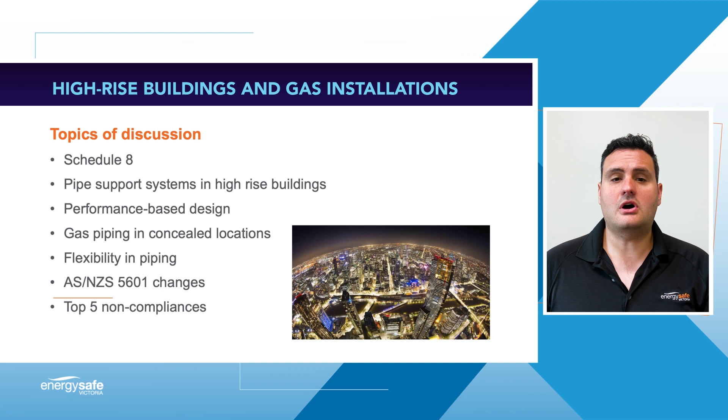Gas piping in concealed locations will highlight what is considered a concealed location and what are the requirements in order to comply. Consideration of various methods to provide flexibility for copper piping systems in high-rise installations. Proposed changes to AS/NZS 5601 Part 1 and top 5 high-rise non-compliances identified by ESV.

My name is Doug Rennie. I'm a gas inspector with Energy Safe Victoria and I'll be discussing Schedule 8 gas application document requirements. To begin, we need to understand why Schedule 8 documentation is required.

The Gas Safety Act 1997 has been gazetted by the Victorian Government. The Act calls up the Gas Safety (Gas Installation) Regulations 2018, which contains the Schedule 8, listing requirements for additional information that is required in certain circumstances. These circumstances include installations that exceed 3,800 megajoules per hour, exceed 200 kPa, or exceed 10 stories above the ground.

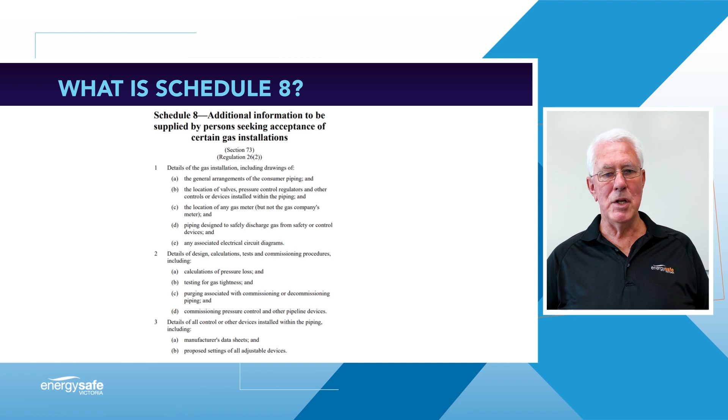At times a response will be not applicable, which is perfectly fine, but an explanation will be required to support your response. Some Schedule 8 applications clearly don't meet our expectations. It is in your best interest to provide ESV with all the relevant information required for the Schedule 8 application. This information needs to be relevant, detailed and comprehensive, responding to each listed item.

If the information is adequate for ESV to process the application without requiring further information, this will prevent subsequent delays in the processing of your application. Details of the gas installation, including drawings of the general arrangement of the consumer piping, should be in the form of a legible schematic.

The drawings should include a title block with the installation address, the location of any valves, regulators or other control devices, the method used for pipe support, both vertical and horizontal runs, including provision for flexibility where required. For example, anchors, slide guides, flexible hoses and the like. Gas riser shafts or service cupboard details, including location of any offsets.

Ventilation details relating to the gas riser shaft or service cupboard. The piping materials, operating pressure, location of submeters, vent line design and its termination point. Any associated electrical circuit diagrams for devices or interlocks that may be installed, such as gas solenoid valves, pressure proving systems, or air pressure switches used to monitor mechanical ventilation.

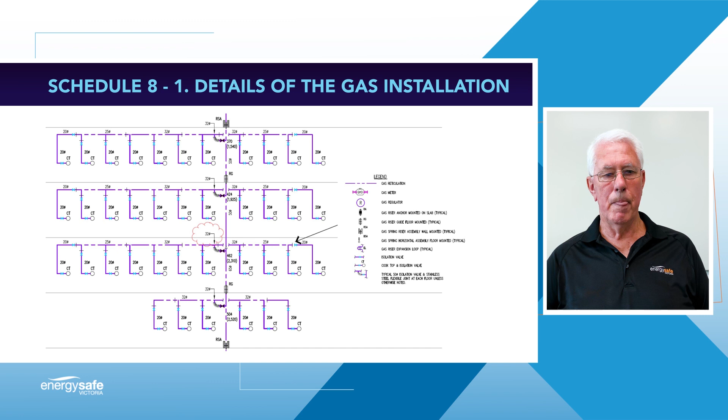The design pressure drop must be nominated in your application. This requirement relates to the pipe size and not to the gas tightness testing. Allowable pressure drop is usually calculated considering the supply or metering pressure and the minimum pressure required for an appliance or regulator. 5601.1 Appendix F provides guidance for the pipe sizing and allowable pressure drop.

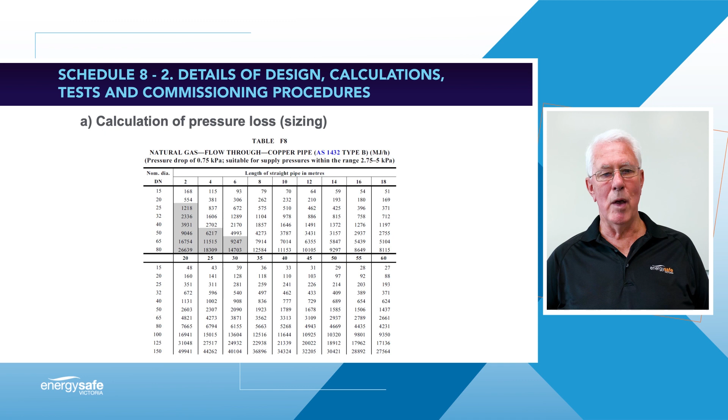Where 5601 is used for pipe sizing and allowable pressure drop, please nominate the sizing table used. Pipe manufacturers may provide appropriate pipe sizing tables for pipe materials not listed in 5601.1 Appendix F, for example, cross-linked polyethylene PEX pipe. If determined by calculations other than from 5601.1, you should nominate who has completed the calculations and their experience.

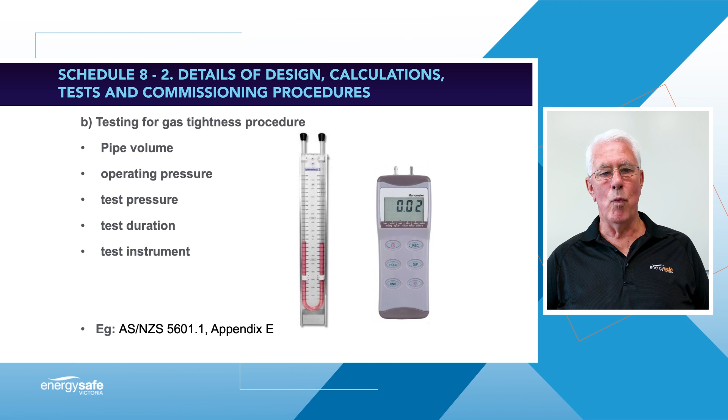Stating in the application that 5601.1 Appendix E is being used as the gas tightness testing procedure satisfies this section of the Schedule 8, but you must also include the pipe volume, operating pressure, test duration, and the test instrument used, which must be suitable for the pressure and the volume being tested. For example, a dial gauge with a range of 1 to 1000 kPa is not suitable for a 7 kPa test.

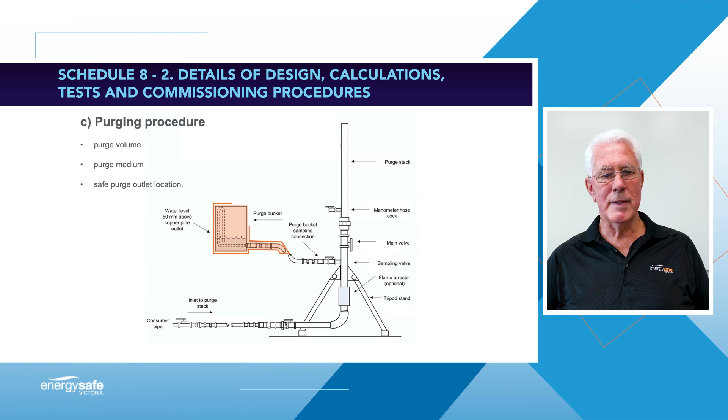For large volume installations above 30 litres, as is commonly found in high-rise buildings, you may reference ESV Gas Information Sheet 14 in the development of your purge procedure. For branch lines under 30 litres, you may reference 5601.1 Appendix D. A comprehensive purge procedure must be submitted with the application and must also include the purge volume, the purge medium to be used, such as an inert gas for larger installations, the safe purge outlet location, and purge equipment that will be used, such as a purge stack, purge buckets, or a suitable gas detector.

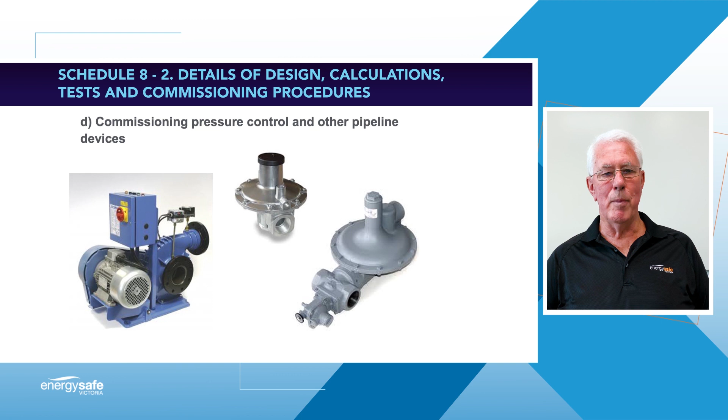Provide details about the commissioning procedure for pressure control devices such as regulators, including overpressure shutoff (OPSO) regulators, pressure proving solenoid valves and gas boosters. In most instances, a copy of the manufacturer's commissioning instructions will satisfy this requirement. This is also important information that will be required for the project manager and commissioning staff on site.

Manufacturers' data sheets are required to be submitted with your Schedule 8 documentation for all control devices and appliances that will be installed. Data sheets should include information such as installation instructions, product specifications, and certification details as applicable. Where gas cookers are installed, the installation instructions should include both the cooker and the range hood to ensure appropriate clearances are provided.

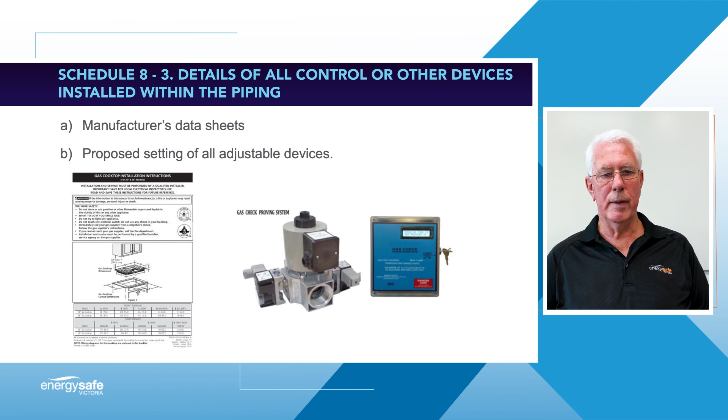Provide the proposed settings of all adjustable devices. This will include settings for devices such as regulators, overpressure shutoff, pressure switches, and the like. ESV has developed Information Sheet 60 to assist you with your Schedule 8 application. This can be found on the ESV website under Gas Technical Information Sheets.

My name is Kevin Dwyer and I'm a gas inspector with Energy Safe Victoria. I will be discussing pipe support systems and performance-based designs. This presentation will be in two parts, with Part A discussing the means of compliance requirements in AS/NZS 5601 Section 5 for the support of consumer piping, and Part B will outline the option for submitting a Section 2 performance-based design for a piping support system where the support method will not comply with Section 5, and discuss the minimum requirements that Energy Safe Victoria expect for a performance-based design application.

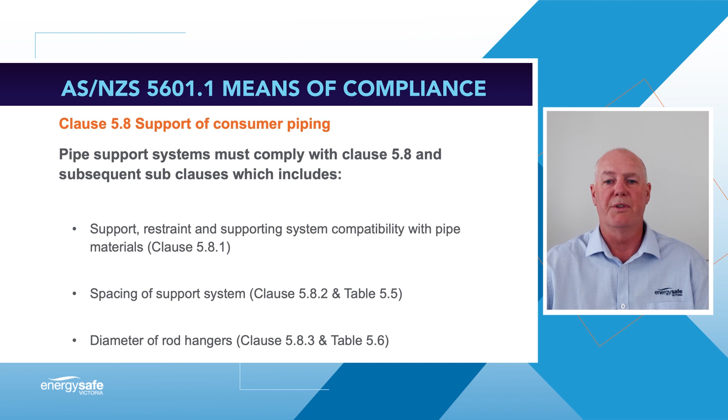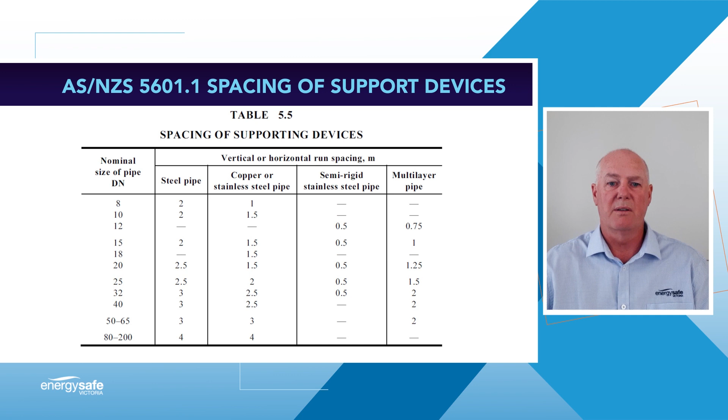Clause 5.8.2 and Table 5.5 detail the means of compliance requirements for the spacing of support devices in the piping support system. And Clause 5.8.3 and Table 5.6 detail the means of compliance requirements for rod hangers used as part of the piping support system. We will now explore these clauses in further detail. Table 5.5 details the spacing requirements for support devices within a piping support system. You will note that support spacings vary based on the pipe material and diameter. Spacings apply to vertical and horizontal runs.

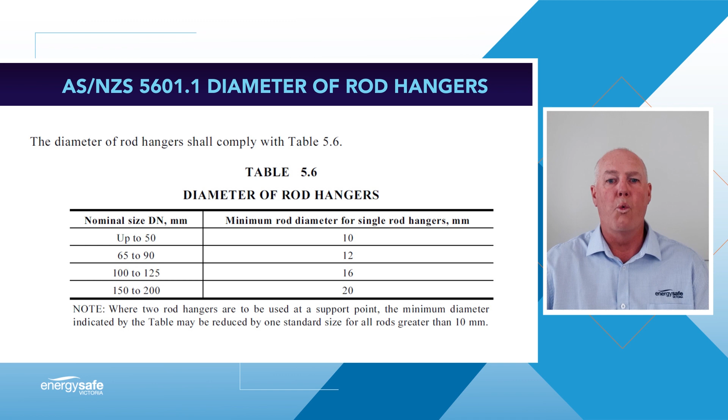Table 5.6 details the minimum rod hanger diameter for a given pipe size. The practice of installing undersized rod hangers at spacings less than those required by Table 5.5 is not a means of compliance with Clause 5.8. For example, 100mm copper pipe requires a 16mm rod diameter at a maximum 4m spacing. Installing a 12mm rod hanger at 2m spacings for 100mm copper pipe is not a means to comply.

The normative note under Table 5.6 permits rod hangers with diameters greater than 10mm to be reduced by one size if two reduced size rods are used at the one support point. This concession only applies for the support of one pipe and does not apply where multiple pipes are installed alongside each other, for example on a trapeze at the one support point. The practice of reducing the diameter of rod hangers greater than 10 millimeters and then increasing the amount of rod hangers, thus reducing the spacing of support devices, is not a means of compliance with Clause 5.8.

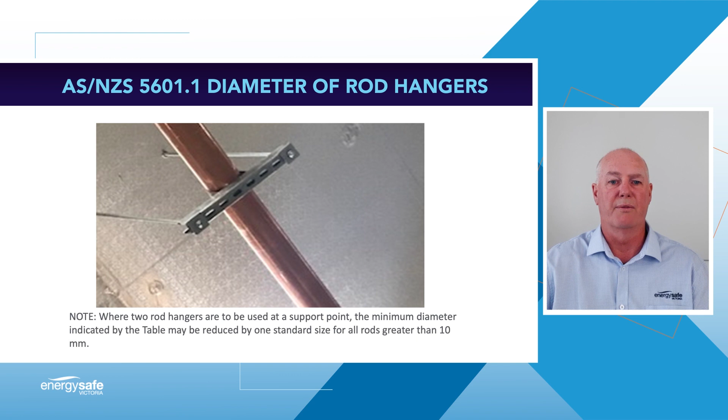In Part B of this presentation, we will outline the option for submitting a Section 2 performance-based design for a piping support system where the support method will not comply with Section 5, and discuss the minimum requirements that Energy Safe Victoria expect for a performance-based design application.

The current gas installation standard includes Section 2, performance-based design and other essential requirements. This section was not previously part of the 2004 AS5601 gas installation standard. Section 2 was introduced to allow industry to design a gas installation as an alternative to the means of compliance sections 3 to 6.

Performance requirements are listed for the following areas: general work and safety requirements, materials, fittings and components, consumer piping, flues, and installing gas appliances. Requirements for each area are detailed in clauses just like in sections 3 to 6.

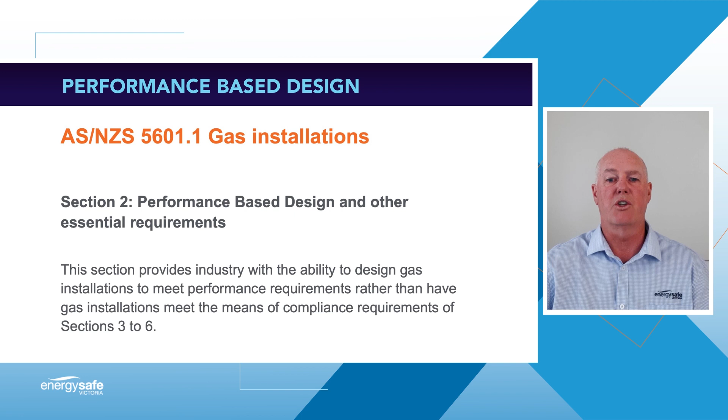Section 2, Clause 2.1 General lists specific requirements when designing a gas installation to a performance-based design. Designs are required to provide an equivalent level of safety, convenience, and efficiency of operation as those installations carried out to comply with sections 3 to 6. A performance-based design shall be documented and kept for 7 years.

Practitioners are advised to consult with their insurance provider and the relevant building surveyor prior to undertaking a performance-based design to ensure they are permitted to carry out an installation to a performance-based design. Energy Safe Victoria also has minimum requirements for submitting a performance-based design, including a clear statement that there is a performance-based design as part of the gas application.

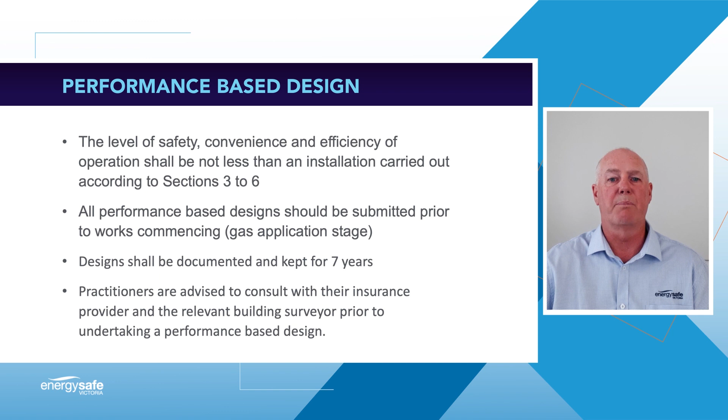You will need to attach a separate document that outlines the design proposal. This should be done for each individual gas application where the performance-based design applies. The performance-based design should be submitted with the gas track application. This will prevent unnecessary delay with the final acceptance of your gas application.

The performance-based design should clearly state the Section 2 clauses it is intended to satisfy and identify the related clause or clauses in the means of compliance sections 3 to 6. Design applications will be reviewed on a case-by-case basis, and no guarantee is given that a performance-based approach will be accepted by ESV.

Information Sheet 63 has been created to provide guidance to those planning to submit a performance-based design for consumer piping support. I strongly encourage everyone that is considering developing a performance-based design to familiarise themselves with the information within this sheet. Information Sheet 63 outlines ESV's expectations for this type of application.

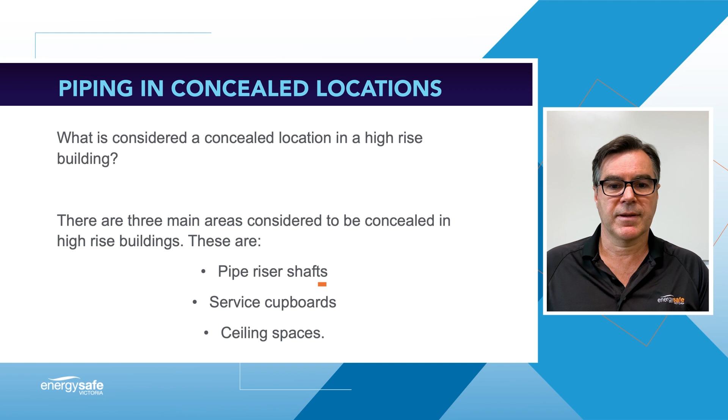ESV has developed Information Sheet 10 to assist industry in understanding how to meet the requirements of the gas standard as it applies to high-rise buildings. In order to determine what is required when installing pipework in high-rise buildings, we first need to understand what is considered a concealed location. There are three main areas considered to be concealed in high-rise buildings. These are pipe riser shafts, service cupboards and ceiling spaces.

Table 5.2 of AS/NZS 5601 describes the requirements for piping in concealed locations. This table gives guidance to the accessibility and ventilation requirements based on the operating pressure and the type of jointing method used as listed in Table 4.1.

For example, a fully welded pipe with permanent joints up to and including 7 kPa is not required to be accessible or ventilated. However, if non-permanent joints are installed in the same scenario, then ventilation must be provided. Access must also be provided to components such as valves, hoses and spring clips.

You will note from the table that pipework exceeding 7 kPa must be accessible, located in a ventilated area and have permanent joints. In order to determine what a non-permanent joint is, first we need to consider the definition of a permanent joint. This is a joint that is not intended to and cannot readily be disassembled. Examples of this are brazed, welded, crimped and hydraulically or mechanically compressed joints. Therefore, any male or female thread, compression fitting or flange is considered a non-permanent joint.

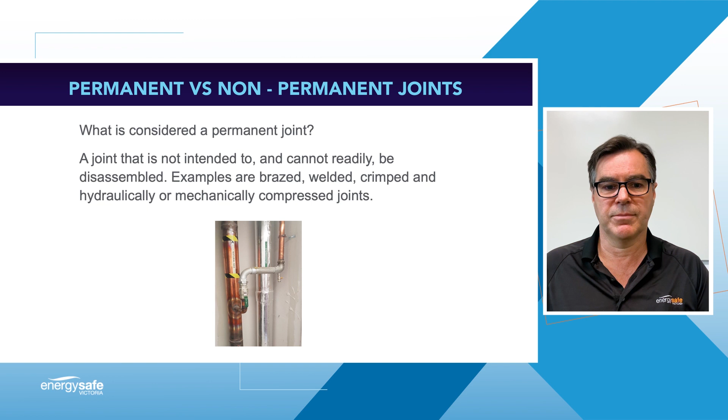We can see in the photo an example of non-permanent joints including the valve, test point and hose assembly. The use of a quick setting thread compound such as Loctite is not considered to be a permanent joint.

A pipe riser shaft is considered a shaft that is vented at the top and bottom and open from floor to floor in a high-rise building. It is sealed from adjacent areas and normally fire rated. Consumer piping and components installed in a pipe riser shaft are deemed to be concealed, even if accessible via an access panel or door.

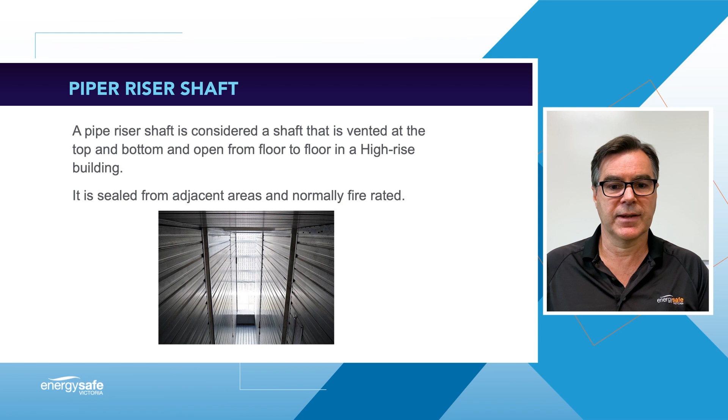When non-permanent joints are installed, pipe riser shafts require venting to a safe location. The riser shaft will need to be sealed from adjacent wall and ceiling cavities. This is to prevent the possibility of leaking gas migrating into the building structure, taking into consideration that the shaft itself should be ventilated to a safe location external to the building.

A service cupboard is considered a void that is accessed via a service door and sealed from level to level. Consumer piping and components installed in a service cupboard or void are deemed to be concealed, even if accessible via an access door. Where non-permanent joints are installed, service cupboards will require venting. The service cupboard or void will need to be sealed from adjacent wall and ceiling cavities to prevent the possibility of leaking gas migrating into the building structure.

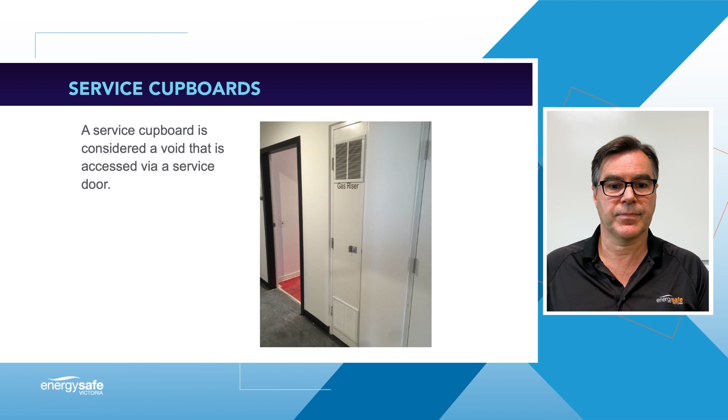Consumer piping and components installed in ceiling spaces are deemed to be concealed, even if accessible via an access hatch or panel. When non-permanent joints are installed, ceiling spaces will require venting. Ceiling spaces in high-rise buildings are difficult to ventilate due to the building construction, and therefore non-permanent joints should be avoided. This can be achieved by using permanent joints such as crimped or welded fittings.

Ceiling spaces containing non-permanent joints, for example occupancy isolation valves, are to be isolated from the ceiling to prevent the possibility of leaking gas migrating into the building structure. This may be achieved by installing a sealed box surrounding the non-permanent joint with an access hatch incorporating ventilation to the space below.

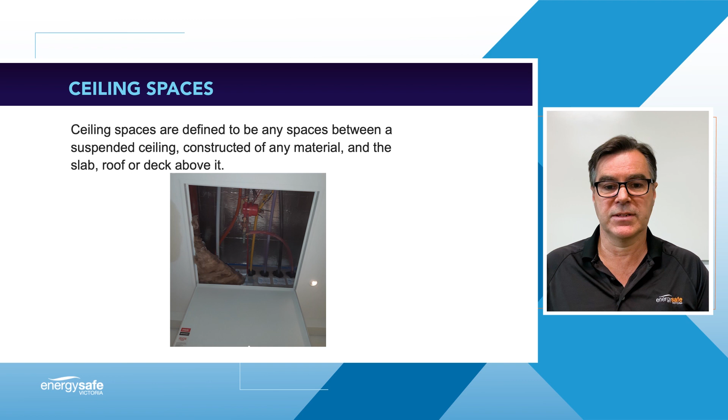Where you have established the need to provide ventilation for these concealed locations, you then need to calculate the minimum size for these ventilation openings. Ventilation openings shall be provided at each end of the area and must terminate in a safe location. Table 5.3 enables you to calculate the minimum required ventilation opening size based on the cross-sectional area of the void or duct. Most service cupboards or pipe riser shafts will have a cross-sectional area less than 7.5 square metres. Therefore, the minimum free ventilation area for each opening will be 0.05 square metres.

0.05 square metres is equivalent to 50,000 square millimetres. This equates to an area of free ventilation of at least 223 millimetres by 223 millimetres, or 9 inches square in the old scale. This is the minimum free ventilation area required for each vent. Please note that grills will restrict the free ventilation area, and the overall vent size may need to increase accordingly.

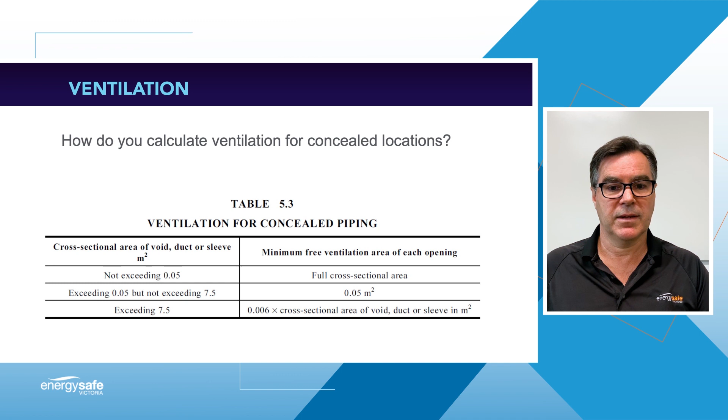Where service cupboards are to be vented, the vent locations should be within 5% of the top and bottom of the enclosure. This may require a false ceiling to be installed in order to achieve the 5% requirement.

Depicted is an example of how ventilation has been provided for the pipe riser shaft. The openings have been calculated to provide a minimum of 0.05 square metres. By coordinating with your builder, these penetrations could be provided by simply boxing out within the riser shaft at construction stage. This will prevent the need to drill adjacent core holes in order to comply.

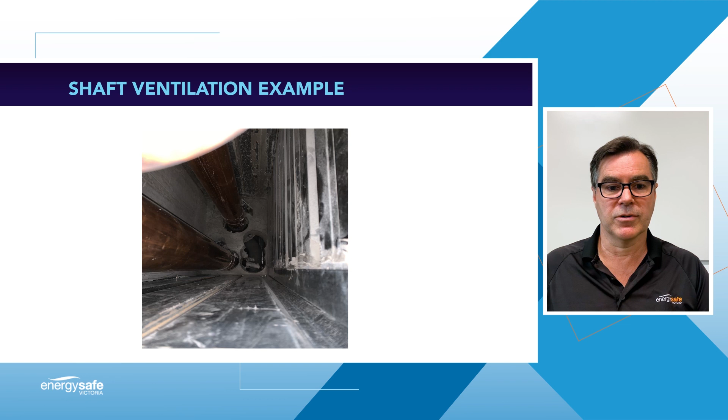Hi, my name is Paul Makarievsky. I am a gas inspector with Energy Safe Victoria, and I will be discussing flexibility in piping systems.

In many instances, flexibility of consumer piping is overlooked on horizontal sections. For example, pipework located in basement car parks and on rooftop plant decks. This presentation will help you understand where flexibility for consumer piping is required and how it can be provided.

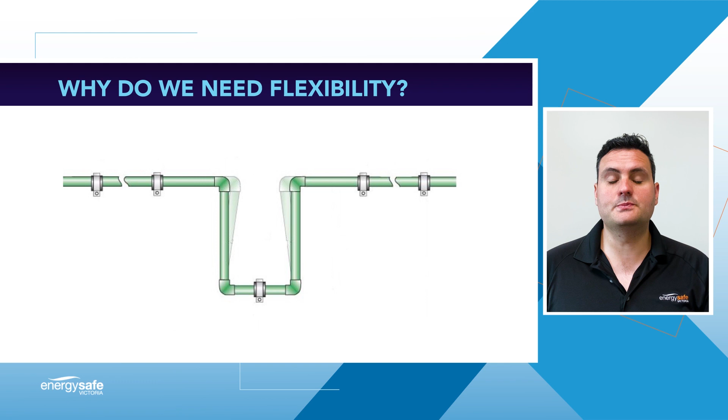Why do we need to provide flexibility? Copper piping expands and contracts with temperature changes. Therefore, in a copper piping system, the pipeline can buckle or bend when it expands unless compensation is built into the system. Harmful stresses, buckling and bending are prevented by providing expansion joints, loops or offsets, and pipe slide guides.

Consumer piping shall be designed to have sufficient flexibility to prevent excessive stress in the piping material and attached equipment caused by thermal expansion and contraction, excessive bending or loading at joints, and undesirable forces or movements at points of connection to equipment or at anchorage or guide points.

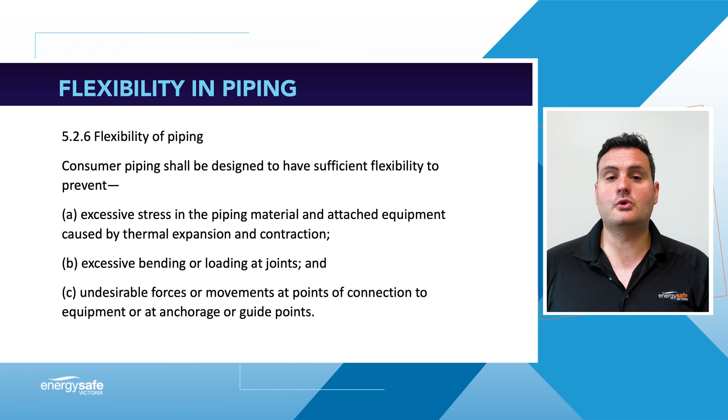What does this mean to you as a licensed gas fitter? It means that formal calculations may be required where reasonable doubt exists regarding adequate flexibility of the system. Based on these calculations, the requirements of this clause may be satisfied by use of one or more of the following: bends, loops or offsets formed in the piping, flexible joints or couplings of the type designed to absorb thermal expansion and contraction, or expansion joints.

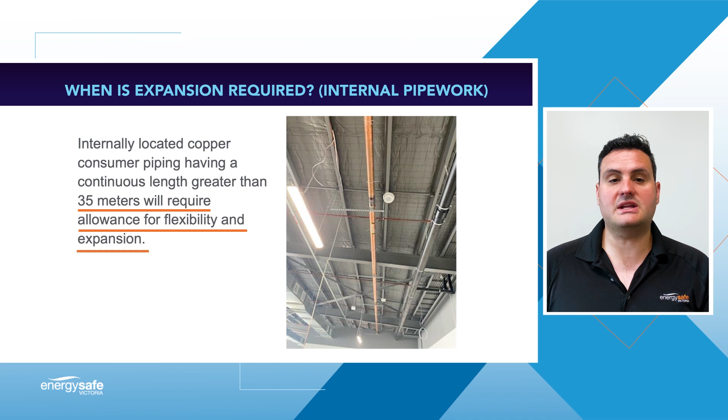So when is expansion required for piping systems? Based on calculations of the rate of linear expansion for copper when subjected to temperature change, we know that internally located consumer piping having a continuous length greater than 35 meters will require allowance for flexibility and expansion to be provided. Copper piping systems located externally are subjected to greater temperature changes, and therefore provision is required for expansion where a continuous length exceeds 17 meters.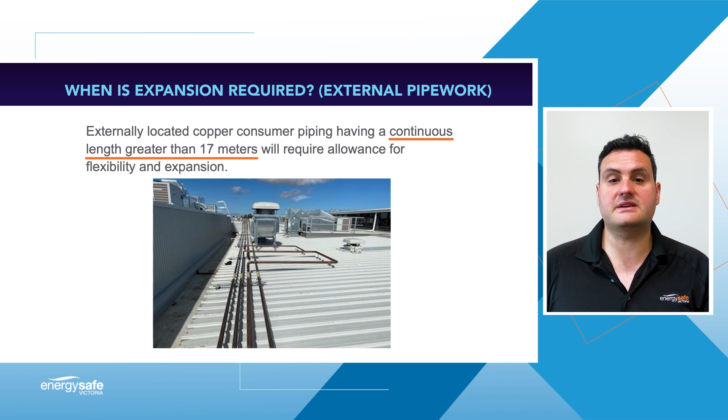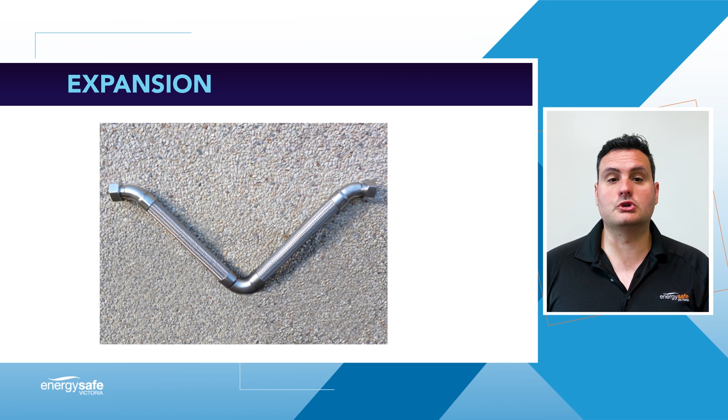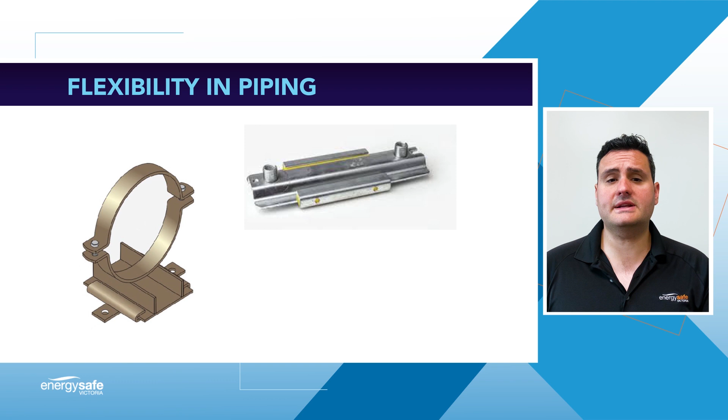There are various methods whereby expansion can be provided to a copper consumer piping system. Some common methods include flexible hose assemblies and expansion offsets or loops installed within the pipework. Where provision for expansion is installed, such as offsets and loops on copper piping systems, pipe slide guides may be required. An expansion loop on its own will not necessarily allow adequate pipe movement if every support point on the piping system is rigid. Pipe slide guides allow for the piping system to move with thermal expansion.

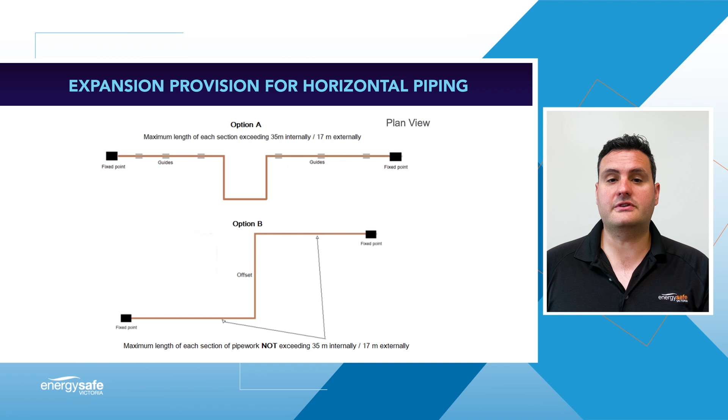Allowance for this expansion is to be provided between the fixed points using either a loop, as depicted, offsets, or other suitable means. The size of loops and offsets will need to be designed to allow for the calculated movement. In option B, the pipe layout is designed with an offset to allow for expansion, and runs are limited to less than 35 meters internally or 17 meters externally. In this instance, the main run can be clipped as normal with consideration to the location of clips on the offset, allowing for any expansion to take place.

Hi, my name is David Crew. I'm a gas inspector with Energy Safe Victoria, and I will be discussing proposed changes to AS/NZS 5601. By way of background, the Standards Australia AG6 Committee is comprised of 35 members representing various organisations within the gas industry. This includes the Gas Technical Regulators, Master Plumbers, Gas Appliance Manufacturers Association, and Gas Energy Australia.

The current AS/NZS 5601 project commenced back in July 2016, with a public comment draft expected to be released in early 2021. Everyone is given the opportunity to comment on the draft. Once the public comment draft closes, all comments will be reviewed by the Standards Committee, and a second public comment round may be required based on the extent of changes made. The final publication of the standard will be made once the final draft has been accepted by a committee ballot.

Some of the proposed changes to the standard include: Section 2 has been separated into essential safety requirements and performance-based requirements. Brazing to be prohibited within 1 metre of a joint with non-metallic components. New drawings including penetration details for consumer piping in cavities consistent with plumbing installation standard AS/NZS 3500 series. Prohibition of the installation of multi-layer pipe above ground and external to buildings. The provision of an emergency isolation for multi-layer pipe installations will be required. There will also be a new definition for fire safety systems.

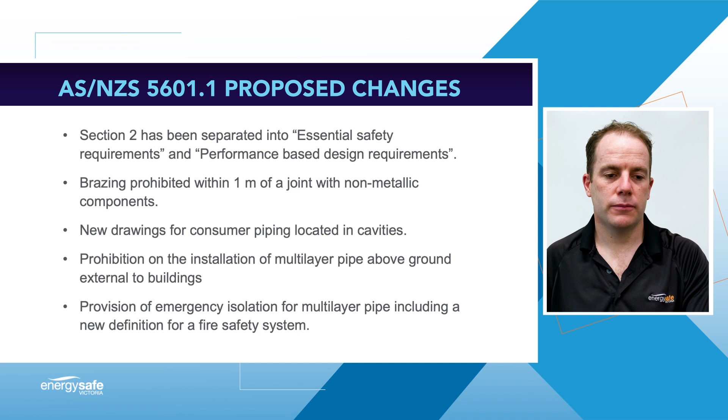Further proposed changes include increased clearance requirements between domestic cooking appliances and range hoods to align with international standards. There will be an update to the pipe sizing graphs and tables, additional information on the effect of altitude on gas supply pressures for high-rise building installations, revised requirements for the installation and location of flue terminals under a covered area, in a recess, or on a balcony. For example, this means that flue terminals will now need to terminate beyond a covered area. New requirements for the location of appliances on roofs, walls, and elevated structures.

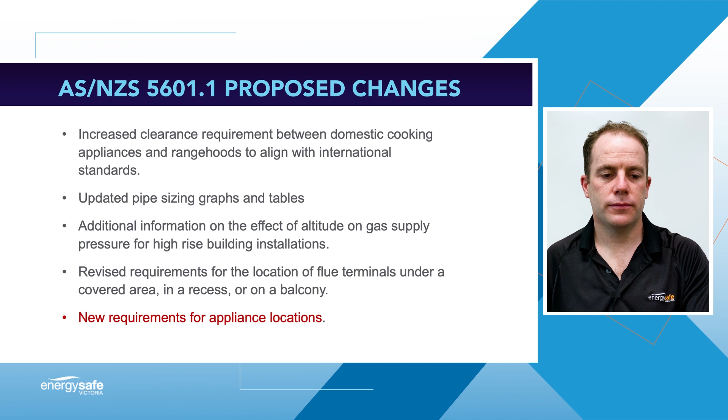Some further works we have lined up for AG6 to consider include the revision of clauses relating to pipe support in AS/NZS 5601, including rod diameter sizes, revision of flue terminal locations, a new biogas installation standard, commercial catering requirements to be included in AS/NZS 5601 Part 2. This information is relevant to mobile catering installations.

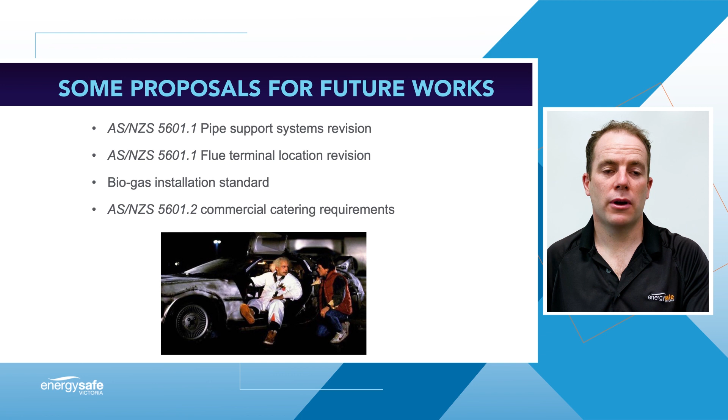How can you comment on AS/NZS 5601, the public comment draft? Well, there are various avenues to comment, including through the Master Plumbers, and members can approach the Master Plumbers directly for comment. You can also directly comment via the Standards Australia portal. Submissions must identify the clause that you are commenting on and a proposed solution.

My name is Kerry McDonald. I am a gas inspector with Energy Safe Victoria, and I will be discussing the top 5 non-compliances relating to high-rise buildings that ESV inspectors encounter.

Non-permanent joints in concealed locations are often encountered on site by our inspectors. Common locations that this is cited include ceiling spaces and access hatches. The installation of permanent joints such as crimped or welded joints can be used to achieve compliance in these areas.

We also find gas pipework terminating within ceiling spaces for future extension by others. Where this pipework terminates with a non-permanent joint, such as a plugged isolation valve in a ceiling space, the location must remain ventilated and accessible. Where it is evident that ceilings are to be installed at a later date, it is advisable to terminate the pipework with a permanent joint, such as a welded or crimped cap, or locate non-permanent joints in an area that will remain ventilated and accessible.

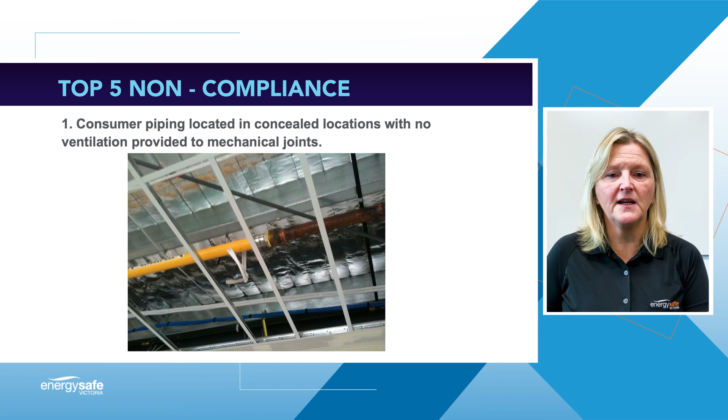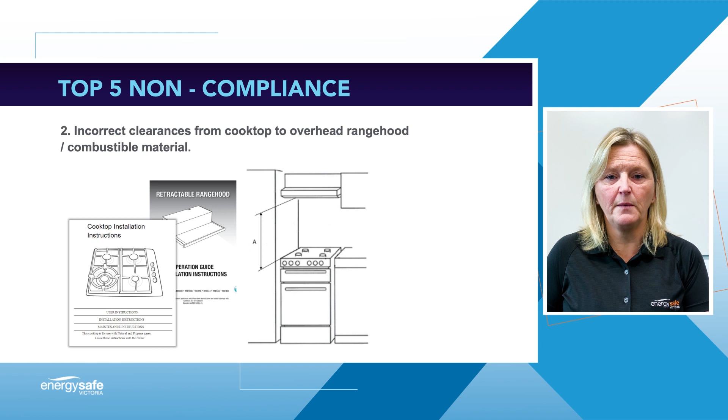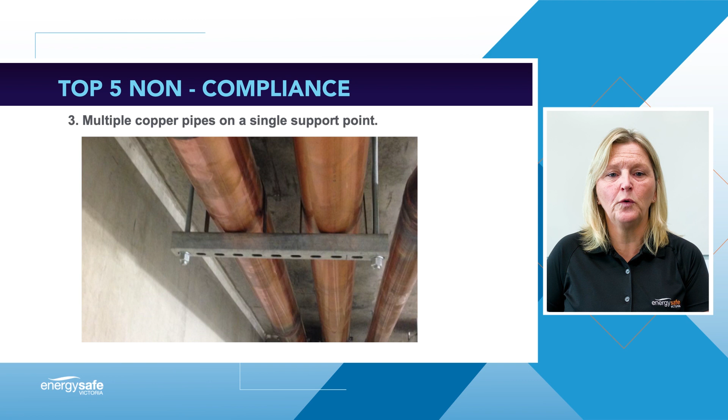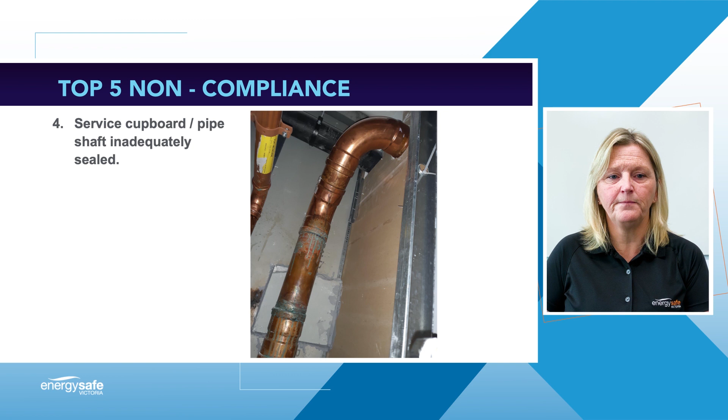ESV provides a technical helpline to assist all gas fitters with any inquiries they may have regarding gas installations. ESV has an expectation that all gas fitters make every effort to establish the relevant requirements relating to the inquiry prior to contacting us. Please ensure you have a current copy of the relevant installation standards with you at the time of the call, as this will assist in helping you interpret the standards.